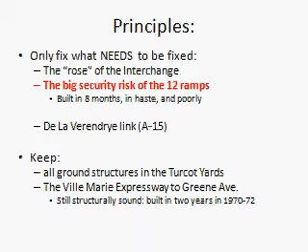The principle we're trying to adopt is only fix what needs to be fixed. We call it the rose of the interchange, which is the big security risk of the 12 ramps built in 1966 in 8 months in haste and poorly. We also include in that the rebuilding of the A15 link towards de la Vérendrye, and we're keeping all ground structures in Turcot yards for Highway 20 and the Ville Marie Expressway, the 720 to Greene Avenue, which is still structurally sound because it was all built in 1970 to 72 all the way to Guy Street.

If you look at the image on the left-hand side, you see what we mean by the 12-ramp interchange, marked up in yellow on the plan. Looking on the right side, you see the state of the interchange 8 months after the beginning of its construction, where it's almost ready to receive traffic, even if the other expressways leading to it aren't even built yet.

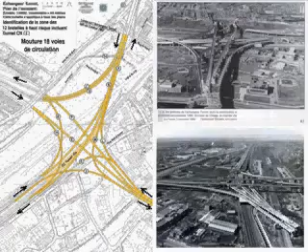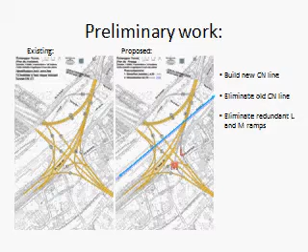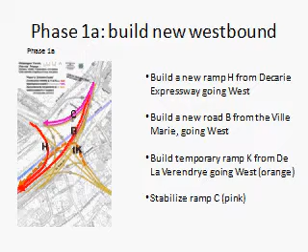So the preliminary work involves relocating the CN line, and then we eliminate the CN line from the tunnel, and also eliminate redundant ramps L and M, which we consider non-necessary. When we go to Phase 1A, we build a new westbound, which involves building the H ramp from Décarie to Highway 20 westbound, building the new access road from the Ville Marie going west, north of the existing eastbound, build a temporary ramp K from de la Vérendrye going west, which is indicated in orange, and stabilizing the ramp C, which is a ramp linking Ville Marie to the Décarie Expressway, eastbound.

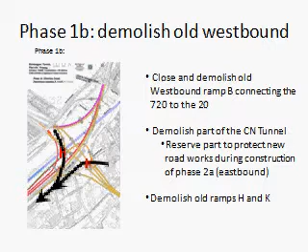Then we proceed to demolish the old westbound, close and demolish old westbound ramp B connecting the 720 to the 20, demolish part of the CN tunnel, reserve part to protect the new structures supporting the ramp J, and then start the construction of Phase 2A, which is construction of the eastbound, and demolish the old ramps H and K in the interchange.

We now build the new eastbound, which also involves the reconstruction of the ramp up to the Décarie Expressway from the 20 coming from the west. We prepare the links for the dedicated bus route, and the new J ramp, which comes in a later phase.

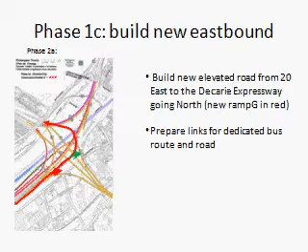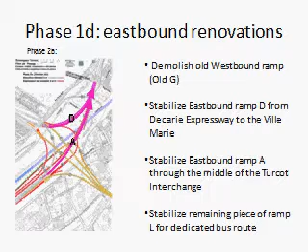Phase 1D, eastbound renovation. First of all, we demolish all the old westbound ramps, which are no longer in use, stabilize the eastbound ramp D from the Décarie Expressway to the Ville Marie Expressway, and stabilize the eastbound ramp A through the middle of the Turcot interchange linking 20 to the 720, and we also profit from the occasion to stabilize the new bus ramp. At this point, the east-west flows are functioning at capacity.

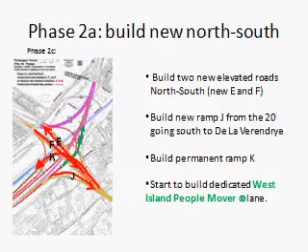Now we concentrate on the new north-south part of the work. So first we build the new elevated roads north-south, which are ramps E and F. Then we build the new ramp J from Highway 20 going south to de la Vérendrye. And finally we build a permanent ramp K linking de la Vérendrye to the 20 eastbound. Then we start to build the dedicated West Island People Mover, which is a specially reserved bus lane, which is part of the work in the interchange.

Then we demolish the old north-south. First we demolish the overpasses E and F. Then we demolish temporary ramp K, which is no longer needed. Then we demolish ramp J, as well as completing the dedicated West Island People Mover through the interchange in both directions. Of course, also demolish whatever is left of the CN rail tunnel.

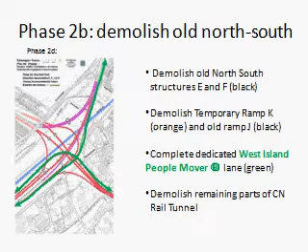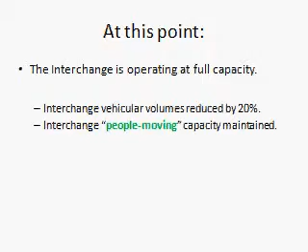At this point, the interchange is operating at full capacity and the vehicular volumes are reduced by 20%, and the interchange people moving system is also operating. We'll detail this people movement approach. What we intend, in fact, is with the new ramps built in the interchange, it provides easy access from the West Island directly to the Lionel Groulx metro station. Then once gone through the metro station, the buses return back out to the West Island. So that completes the intervention for the people mover.

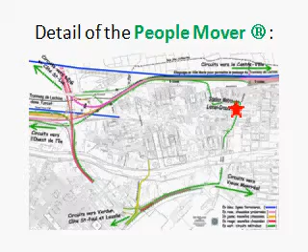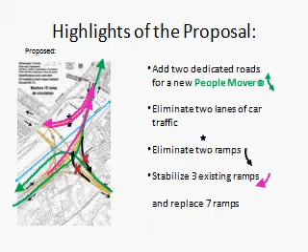And if we highlight the proposal which we discussed, we add 2 dedicated roads for the new people moving system. We eliminate 2 lanes for car traffic on the Décarie-Ville-Marie link, 1 per direction. We eliminate 2 ramps linking the 15 to the south to the Highway 720 eastbound. And we stabilize the 3 remaining existing ramps, as well as replace 7 new ramps in the interchange, which we discussed earlier.

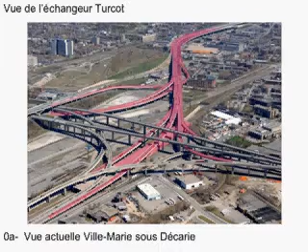Phased construction simulation will show you a rapid simulation of what's to be done. If we look at the next image, we see the existing interchange where there's 2 levels of highway over the rail, which is the pink tunnel, over which Décarie must pass. So the first phase would be to relocate the rail line out of the tunnel so we can start demolishing it. And then the next part would be to build the westbound ramps beside the existing at all times, so it doesn't interfere with the operations of the existing interchange. And finally, we remove the existing westbound.

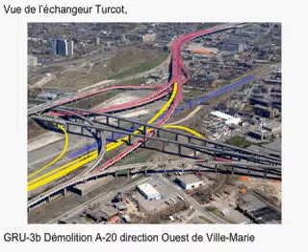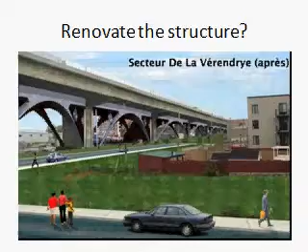At this point in time, we'd like to stress an alternative to just replacing the north-south route, which would see if it's possible to recycle these structures. The type of structures we're looking at is fitting arches underneath the existing structure to support it, if technically possible, or replace with a complete network of arches underneath the remaining ramps of the entire interchange.